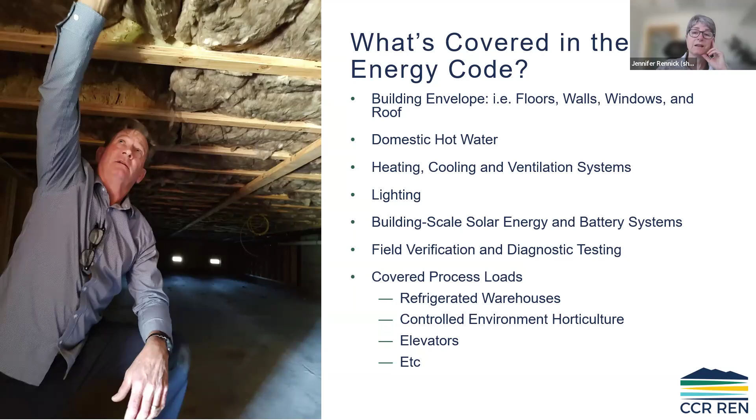Then the things not included are what falls under Title 20, like household appliances, really small scale residential heating and cooling systems, the efficiency of that heat pump you might use in your house—all that testing falls under Title 20, but also walk-in coolers and freezers fall under Title 20. Refrigerated warehouses under 3,000 square feet are not part of the energy code, and temporary structures or ag buildings are not part of it either.

As a little sidebar, I'm going to hand over this portion to Andy because she's going to talk a bit about the process. So that's the bigger picture overview of the energy code, but really, when and where does the energy code show up in the process of design and construction? She's going to hit on that, and then I'm going to dive deeper into the energy code itself.

Awesome, thanks Jennifer. And thanks for folks who've chimed in on their backgrounds and their organizations—it's great to have everybody here.

There's traditionally been a linear approach to design where you have an architect, and even within that, there might be silos where the architect just hands over base plans. Then everything gets into a plan set and goes to a plan checker, a builder, and an inspector, and we don't end up with continuity. We find that the inspector at the very end is stuck because maybe the insulation thickness in the roof doesn't meet the energy compliance, but that's because the framing members weren't sized to meet the energy compliance. So the builder didn't have it on theirs, the plan checker didn't spot it, and the architect hadn't noticed it because things were not done in a coordinated way.

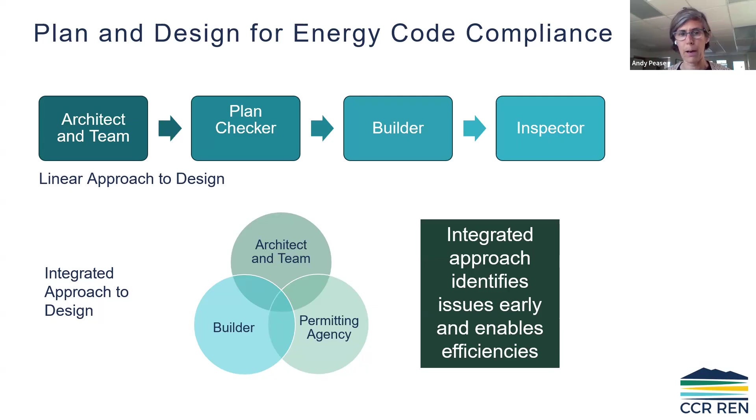So we're really working to talk with folks about that integrated approach to design, so we can identify early on all those nuanced requirements of both the energy code and CalGreen. It starts with this cycle throughout the whole process.

Some of this is going to align with commissioning, building commissioning, where for non-residential buildings you start with a program requirement. But no matter the building type, with the owner, you're going to start with what the owner wants and really understand, from a performance level, what kind of controls they want, what levels of lighting they want. All of those pieces get communicated to the design team, hopefully through an integrated approach, with all the design professionals knowing there's a whole analysis needed for Title 24, making sure that energy component comes in early enough for energy and Cal Green.

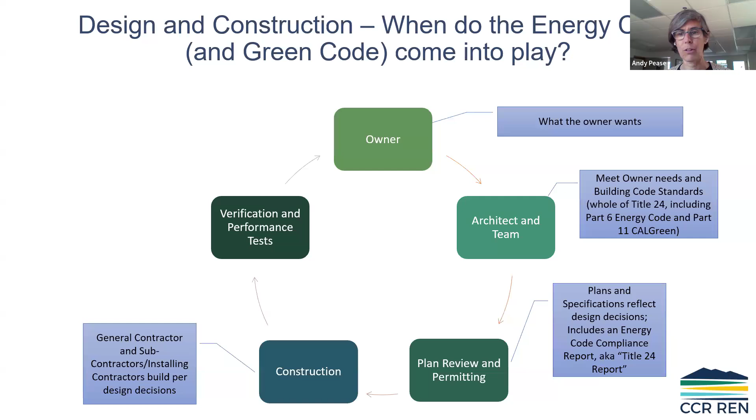Then it goes to plan review. We're trying to work with architects to not just have them report to a Title 24 report, but make sure that information is on the building plans, to the point where those verification measures go on the title sheet rather than being buried with refrigerant testing or something like that, so that nobody gets burned at the end. And then the contractor really knows what's going to be required in terms of those design decisions.

Then you're set up in a good position where the verifications just pop along, everybody's happy, you get your sign-offs, and then we have the happy owner at the end because they got what they asked for up front. So that's kind of the process we hope for, and wherever you are in that point, we're reminded that the earlier the better to involve the energy team into your project.

Anything that I missed, Jennifer, that you want to make sure gets touched on here?

Just as a heads up, HERS raters - the home energy rating system - is what HERS stands for, and that was that slide. Just a warning for everybody, that HERS rater in the 2025 code is now going to be referred to as an ECC, Energy Code Compliance rater. There's a new change in vocabulary, and believe it or not, a lot of those HERS things were under Title 20, and now it's pulled back over to Title 24. That's just a heads up because this code's rolling out in January, so you might be learning one thing now about the energy code, and if you're new to this stuff, then in January you're going to see something else. I just wanted to give you all a warning about that.

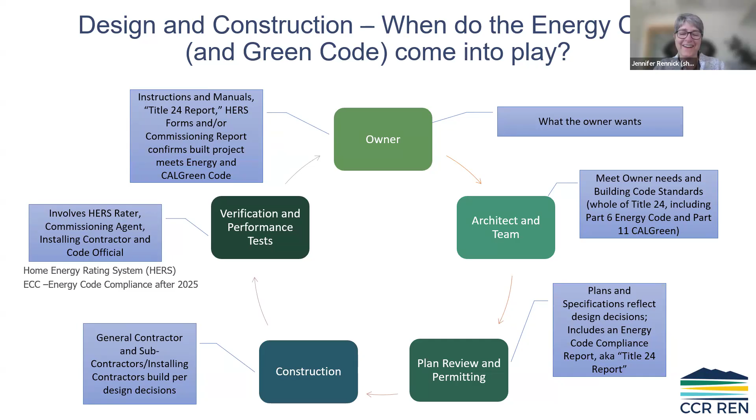Energy code. So now, if you are relatively new to the energy code, we're going to go over some details in this. Some of you are familiar with this a bit, so I did include slides as a heads up of big picture things that are going to come up under the new 2025 code, so you're just aware of it.

But right off the bat, I want to remind folks that there are kind of three key things to keep in mind as you read the energy code. One is that there are mandatory requirements which are applicable to all projects - those are energy efficiency measures that everyone has to meet. Then you can comply with the energy code using a prescriptive component package, or you just hear it called complying prescriptively - the mandatory requirements are still applicable, but now you follow the prescriptive requirements, and it's essentially following a checklist.

Then the other way you can show compliance is through what's called the performance method, or computer modeling method, or energy modeling approach - you'll hear those words interchangeably. This is where the prescriptive component is treated as your standard design building, and that standard design building is compared to your proposed design building. Through this energy software, if you can show that your proposed design is more efficient than the standard design, it gives you the flexibility to design the building the way you want to.

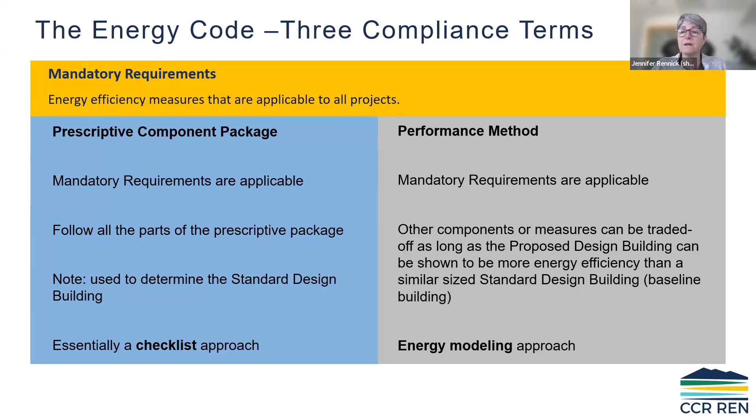Also unique to California is we have 16 climate zones, which I alluded to in that comparison when you look at the big picture of Title 24. The 2.5 standard is based on the international code. It's applicable to and was adopted here in California, but it references the ASHRAE national climate zones. But when you get to the energy code, it's going to be very specific to California's unique 16 climate zones.

Where you find out more about that is in those joint appendices I mentioned, not in the standards language itself. The CEC has an online tool called the EZ Climate Zone Finder, and you can hone in on your climate zone through that website, or look it up by zip code if you don't have a copy of the reference appendices standards. The energy code also has a unique organizational structure.

It's organized differently than all the other parts of Title 24, so I find it helpful to show people what this structure looks like. Subchapters 1 and 2 really deal with all of the occupancy types. Currently, those occupancy types per the UBC, the Uniform Building Code, we have A for assembly, B for business office, etc. So those occupancy types are all addressed.

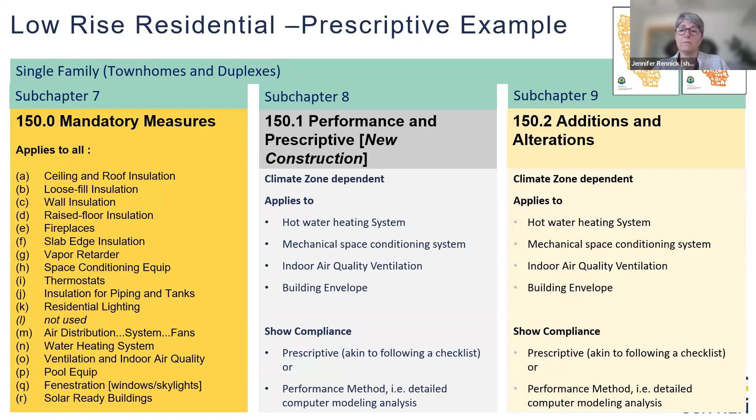So if we were to take a look at wall insulation, for example, and we're looking at performance or prescriptive, it's under the building envelope.

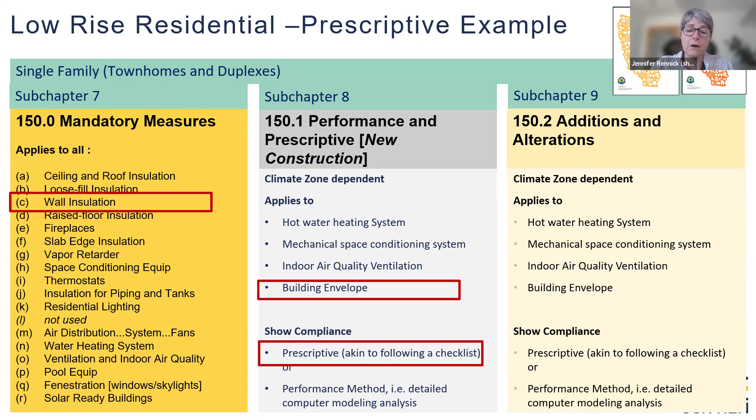We're going to take a look at that, and we're going to look at what we need to do for a prescriptive requirement. In the end, we might take it and use a performance method, but this way we know what our baseline is going to be for the walls itself.

Let's say the project's in Monterey, so climate zone 3, or maybe we're in San Joaquin Valley near Visalia, would be climate zone 13. And we're interested in looking at what's required for wood framed walls prescriptively. We can do trade-offs under the computer method, but we'd enter the table for climate zone 3. We'd go to our walls, they're above grade, they're framed, and then we're given a U factor.

I'm old enough, I remember we call them U values, U factors. I say the words interchangeably, but you'll see the trend now is just to stick with U factors.

So that U value is 0.048. That number, if you're not familiar with this part of the building code or what these words mean, is an indication of heat transfer through that wall assembly. There is some math that goes into calculating it. However, we're able to go into the reference appendices and just basically look up what a 0.048 U factor means - something useful to people in the field, architects and designers.

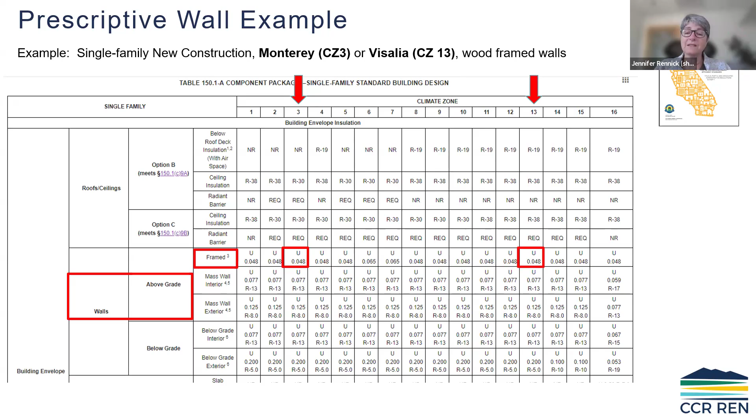We're going to do the same thing for climate zone 13. It happens to have the same value, so 0.048 U factor. So we got the requirement out of the reference, got the requirement out of our standards language. Then we could go to the reference appendices to find out what that U factor really translates into.

In this case, I created a table that I thought was easy to understand, but there are tables specific for each kind of building type. It's organized a little different in the reference appendices, but what it basically refers to is: you have a wood stud wall, how much cavity insulation do you need, and do you need exterior insulation?

For U factors, how they work is you need something that is 0.048 or less. So the smaller the U factor, the more insulative - smaller is better. So we have to look for numbers that are less than or equal to 0.048.

So it turns out for these climate zones 3 and 13, you could have a 2x6 wall and fill it with R21 insulation and put an R5 exterior continuous on it. That would be one solution. There's a variety of solutions, but this is how you comply prescriptively.

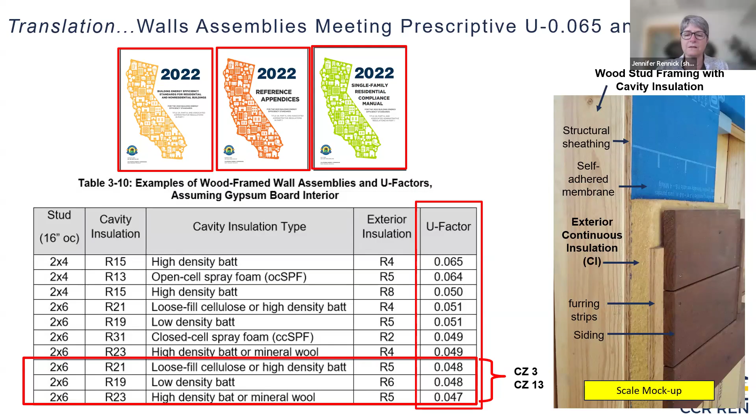So again, they can take a look and go into the standards, find out what the requirement is. Then you look up what is needed for an opaque wall, wood stud, metal stud, have the comparison. And then those reference appendices are going to give you the clue as to what that translates into in terms of a structural assembly.

So your design build team can price out the cost difference and the detail difference, and also consider if they are going to do a trade-off with the wood stud option and not put that R2 on there and try to trade it off with something else.

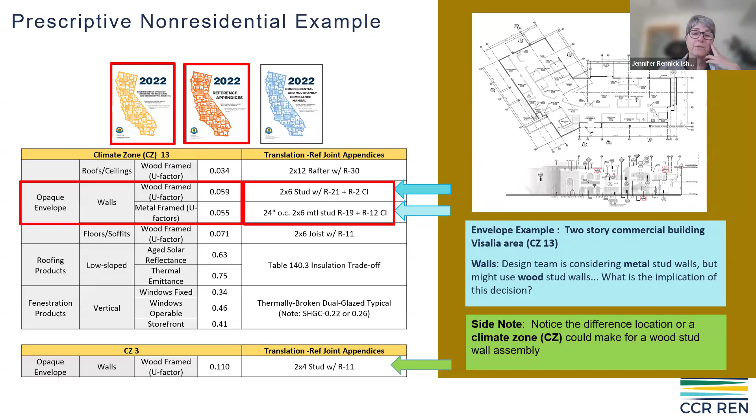For the trade-off, you can look at this computer modeling method and have your mechanical engineer, the architect in-house, or a third-party consultant run what's called Title 24.

With Title 24, there are three metrics we look at: efficiency, how efficient the building is. We have a metric called the total, which includes your photovoltaics and batteries. And then we have a metric called source energy total, which also includes photovoltaics and batteries, but source energy is actually a proxy for carbon impact—the amount of impact it takes to produce the electricity or fossil fuel that goes into the building, or the carbon impact of burning fossil fuel at the building site directly.

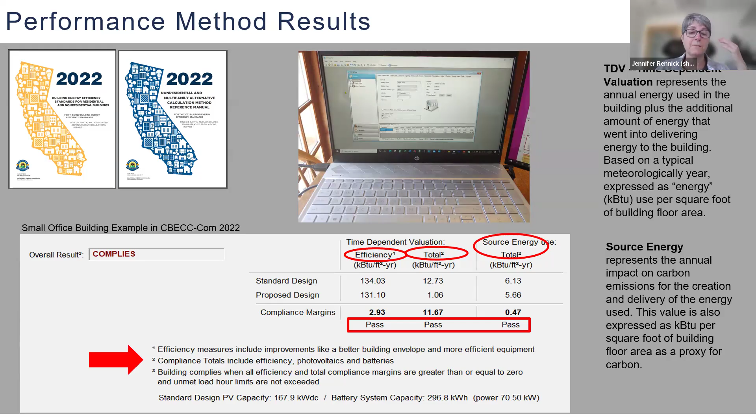Then there are little footnotes down below. If you compare the proposed design to your standard design, and it's positive—meaning your proposed project uses less energy than the standard design—you get a pass. The whole project passes if you pass all three metrics. This particular excerpt from the CBECC-Com software includes footnotes reminding you that the total compliance efficiency, and both total metrics, include your photovoltaics and batteries.

Non-residential projects use TDV, time-dependent valuation, as a metric. Residential has a slightly different metric. Just as a heads up, we're not going into it in this course, but we have other courses you can take.

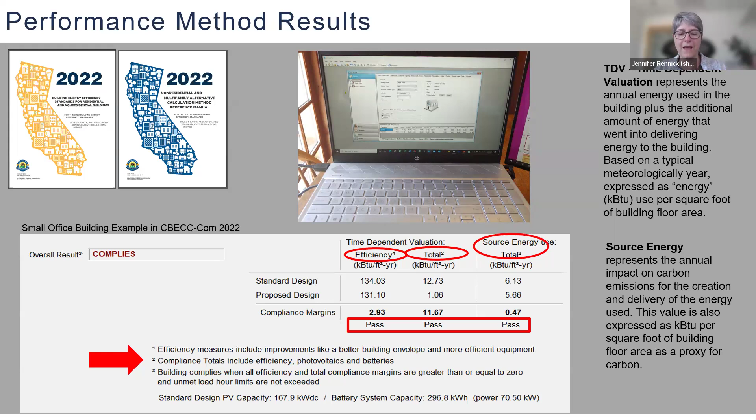Single family under 2025 is changing their metrics slightly, but the concept is still the same: standard design with three things—efficiency, total, and source for carbon proxy—compared to your proposed design. If all three pass, you pass. That part conceptually hasn't changed.

Then we've got this other bucket, the photovoltaics and battery requirement—the energy you're creating on site to help offset those regulated loads. For commercial projects, and you can pull the same information on residential projects if you want, you can get an idea of what's estimated for the rest of the loads, or the rest of the energy use that has to do with plug loads or receptacles, to give a bigger or better idea of the overall impact of your building. So maybe you could use that information to help size your photovoltaic system if you want to go beyond the code requirement.

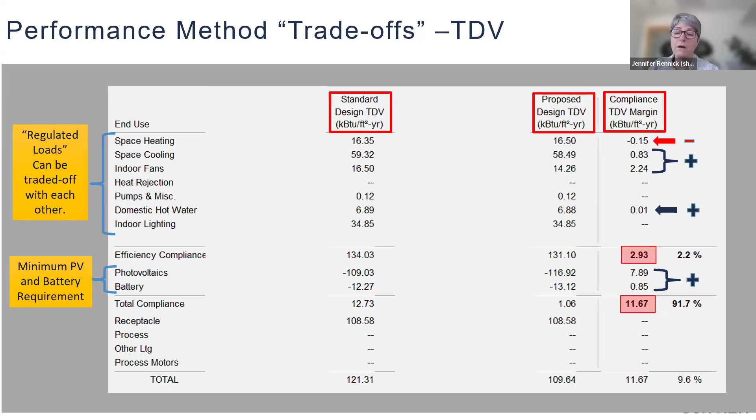Then we look at our photovoltaic and battery. In this case, we sized the photovoltaic and battery to be a little bit bigger than required, and that gave us a positive number. So overall, our project passes.

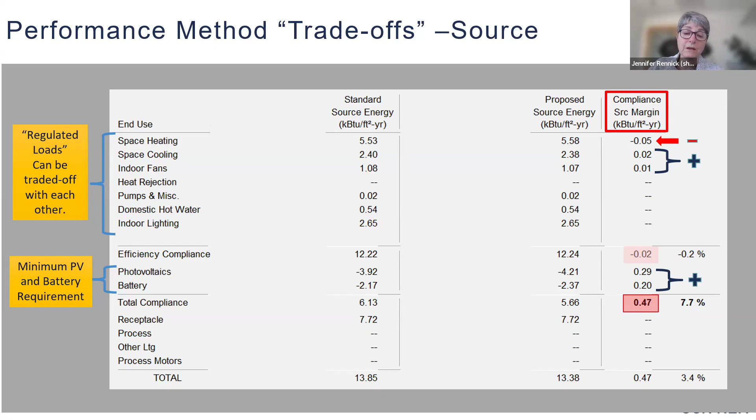And that's what your design team is doing for a project in terms of the energy code.

So that gives you an idea of how the energy code fits into the process and the trade-offs we're looking for. When it comes to getting ready for our 2025 building code, I pulled together a few slides on things I think folks might want a heads up on, what's coming up for the 2025 energy code.

But before we dive into that, I see a few things in the chat. Andy is reminding folks, ESS is for energy storage system, and in the 2025 code you're going to see it written as BESS, B-E-S-S, meaning battery energy storage system. And CI is for continuous insulation, typically at the exterior. Feel free to put any questions in the chat, or let Andy know you have a question or comment.

And then I'm going to go into what we're seeing for 2025 coming up, just to give you all a heads up.

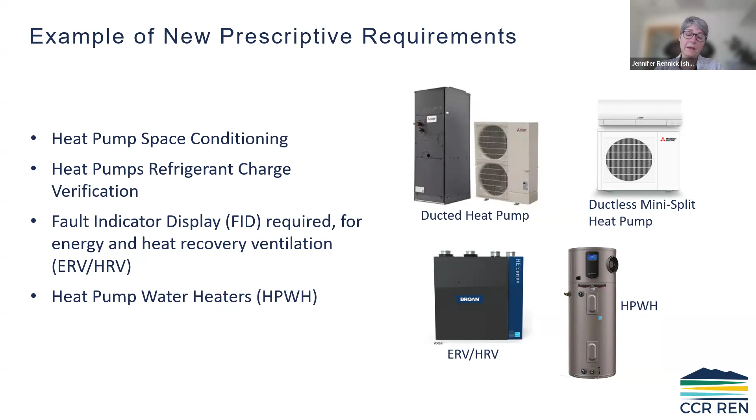One of the big areas that shows up in the 2025 code is more helpful mandatory requirements for heat pump water heaters. I say helpful because we've been following the installation of heat pump water heaters for a while, and since it's relatively new technology, the installations have been less than perfect. When the installations aren't done properly, it gives heat pump water heaters kind of a bad name. There's really nothing wrong with the heat pump water heaters, but there are a few things people need to know about the installation to make the installation and the customer experience positive.

As a result, there are now some new mandatory requirements for how you install heat pump water heaters. That includes the volume of space needed for the heat pump water heater, a little more requirements on ducted systems and ducted options, and more information on where the ducts are installed.

The reason for this is because the heat pump itself extracts warmth energy out of the air, pulling it through a refrigeration cycle, and puts that heat into the tank of water. So the appliance needs access to a certain volume of air so that it doesn't accidentally overcool the air and become less and less efficient.

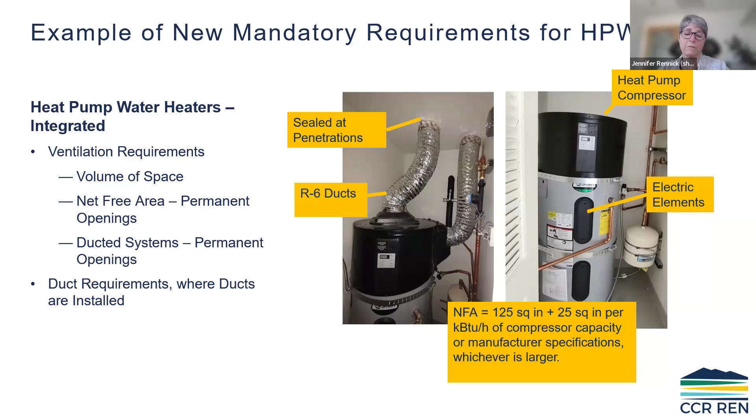You can duct the heat pump to outside air sources to eliminate that volume requirement, but the ducts need to be of a certain size, etc. This is going to improve the performance, and that's why there are some new mandatory measures.

Also, electric-ready in new construction exists right now when gas appliances are installed, because you can install furnaces, water heaters, cooktops, dryers, etc., that burn natural gas. That's legal. If you do, the idea is to remove the cost barriers and set it up so that anyone in the future can easily change it over to an electric appliance.

Then there's an update in the multifamily code. There's a little more detail on how much space you need to reserve for that future heat pump water heater, because they're a few inches larger than a lot of standard tank electric or gas water heaters. That's been one of the issues that comes up — people don't realize they need just a few more inches of space for these heat pump water heaters.

So heads up to the architects, and also to any of you working with ADU plans and over-the-counter permits with that.

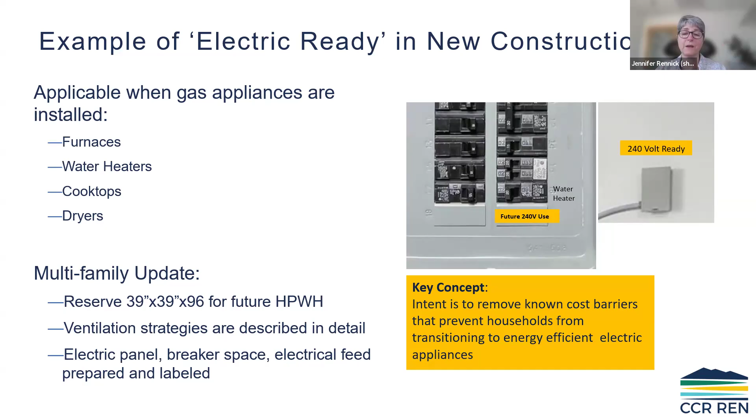It's one of those things where you need to see if, it's not a code requirement, but it's one of those best practices. You could improve the performance of everything if there's enough space for that appliance.

With multifamily central water heating, now new in the 2025 code, there'll be electric ready for central systems. So gas water heating is allowable. You could still have gas on-demand boilers like these Lochinvar units in this big multifamily project I took a picture of. But if they do install a system like that, now the code says you need to actually allocate enough physical space, or at least show where the heat pump water heater tanks would go, where the compressors would go, your strategy for how you would do it. And it includes practical things like condensate drain receptacles, etc.

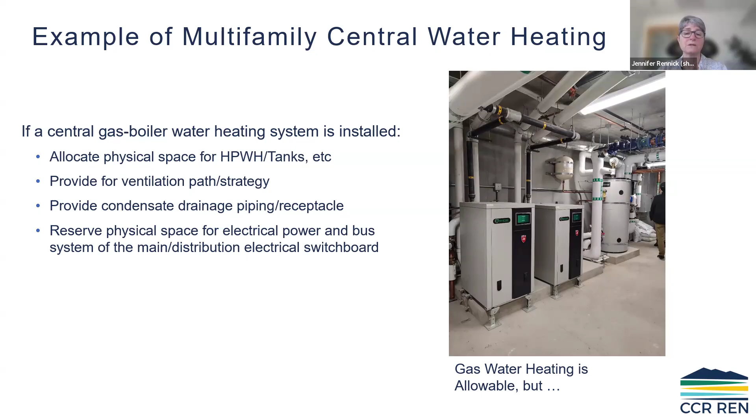And then there's some new code requirements for electric ready on commercial kitchens. So I thought this was pretty interesting. And as a result, the code now includes defining, so we're all on the same page, what a commercial kitchen is, and the difference between a quick serve commercial kitchen and institutional commercial kitchens. There are exceptions to this, but now you'd have the electric infrastructure to be able to have induction cooking on a commercial scale.

And there's been some updates on solar and battery in the high-rise non-residential requirements. Right now, under the 2022 code, a lot of occupancy types do prescriptively require PVs and batteries. Under the 2025 code, some occupancy types were added and some have been increased. So restaurants, for example, had a dramatic increase in the PV battery requirement, which kind of goes hand in hand with electric ready on those commercial kitchens.

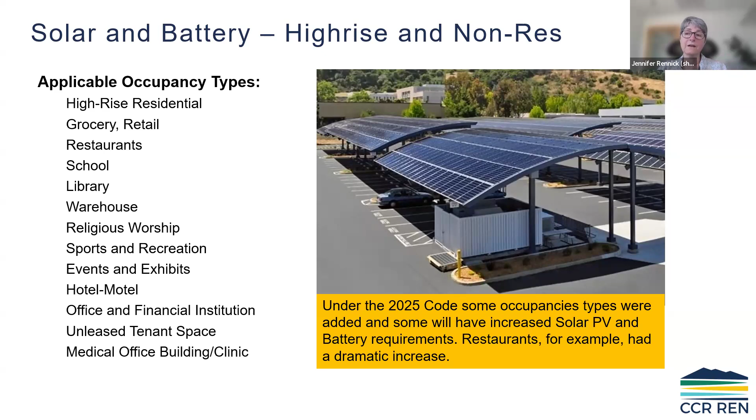Okay, so that's kind of the highlight of upcoming 2025 code changes. I'm going to go through some resources that are available to everybody. And I was just wondering if there were any questions or any comments or anything that Pam or Andy wanted to ask about or chime in on.

I think there's a couple of items that I'll save for the Q&A period at the end, maybe being able to talk a little bit about some of the glitchy spots that we find for compliance that comes up in Code Coach. But I think sharing the resources and making sure folks get all of that first would be great.

Okay, that sounds good. Okay, well, first off, the California Energy Commission. That's a really good site for all things about the energy code.

What I've noticed is the California Energy Commission periodically changes and updates how they link to the resources. So case in point, I thought I had my slide all ready, but I figured I should double check to see if they've changed the website recently. This week I went on, and sure enough, they changed the location of some of these links. So I just want to give you a heads up that if you ever go onto the website and something isn't there, or in the future it's different from what I'm telling you now, don't be super surprised and don't get too confused or upset. You can always reach out to us as code coaches, but also snoop around on a bunch of the links.

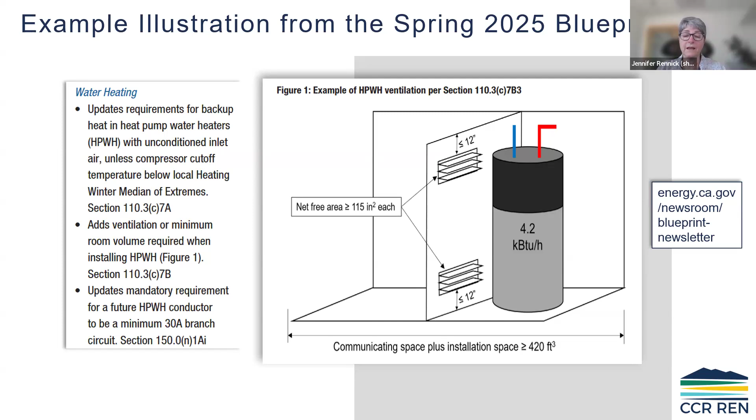This most recent edition is the 2025 Energy Code Single Family Summary of Changes. They list a whole bunch of those changes in one place, so it's a great summary. I love that, given everything we're learning about heat pump water heaters, someone on their staff went to the trouble to draw a diagram to clarify the requirements for volume of space or ventilation area needed for heat pump water heaters. FYI, we do offer and will be offering more information on heat pump water heaters and installation as CCR REN, rural REN, gets going.

CHEERS is the registry. So in California, all of our Title 24 Part 6 residential, low-rise, and single-family projects are registered, and this ties back into the jurisdiction to pull from those registries. It's also where your HERS rater, soon to be called ECC rater, can go find your project and take care of the rest of the paperwork associated with on-site inspections. CHEERS is where we go to register projects, but it's also a good resource for learning more about the energy code and what's required on the HERS side of things.

Energy Code ACE is another great resource. It's contracted with the California Energy Commission right now, and they produce prescriptive forms so you can follow along, answer a set of questions, and it'll fill in the prescriptive forms for complying with Title 24. They also have their ACE resources section, which has a lot of fact sheets, trigger sheets, and checklists. So that's another good resource, kind of a sidebar there.